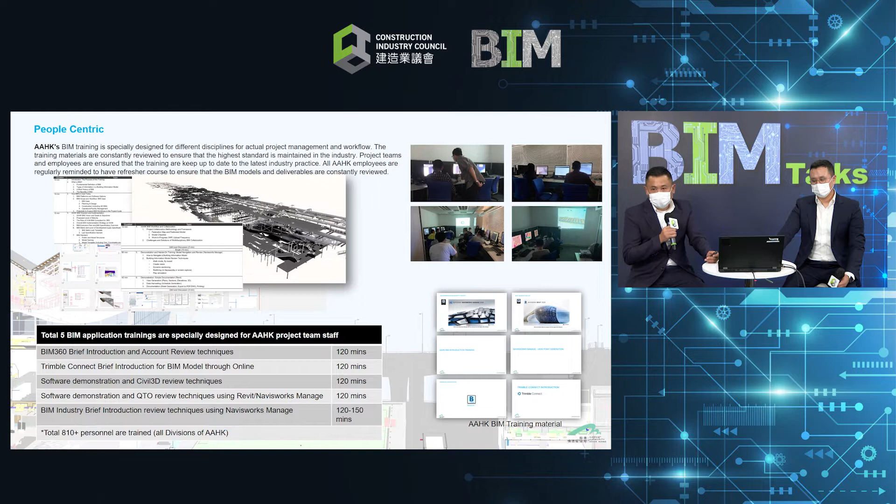In AA's context, BIM is part of the broader digitalization process across the Airport Authority Hong Kong's operations and maintenance as well. So we, the BIM team, always bear in mind that ultimately we should achieve the digital twin for this purpose, and we should contribute to the digitalization of overall operations across the Airport Authority Hong Kong.

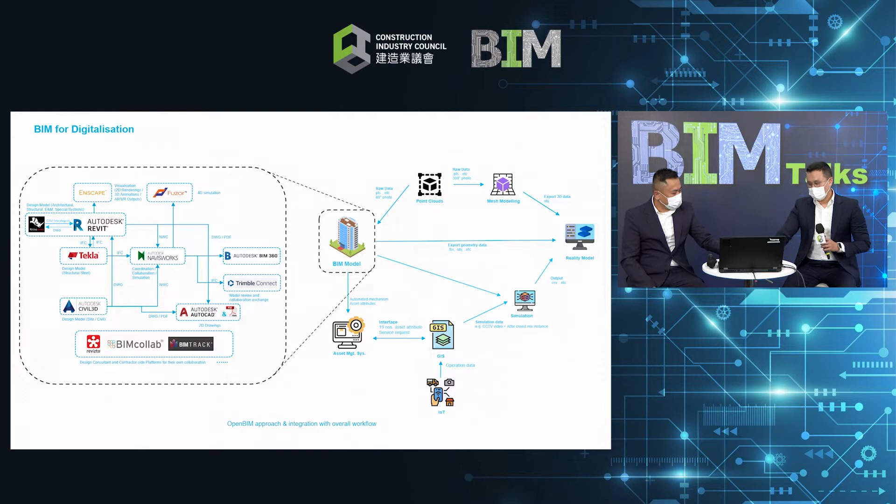So in AA, we adopt the BIM use from the technical circular by the Works Branch, and also the recommendations from the CIC BIM standard.

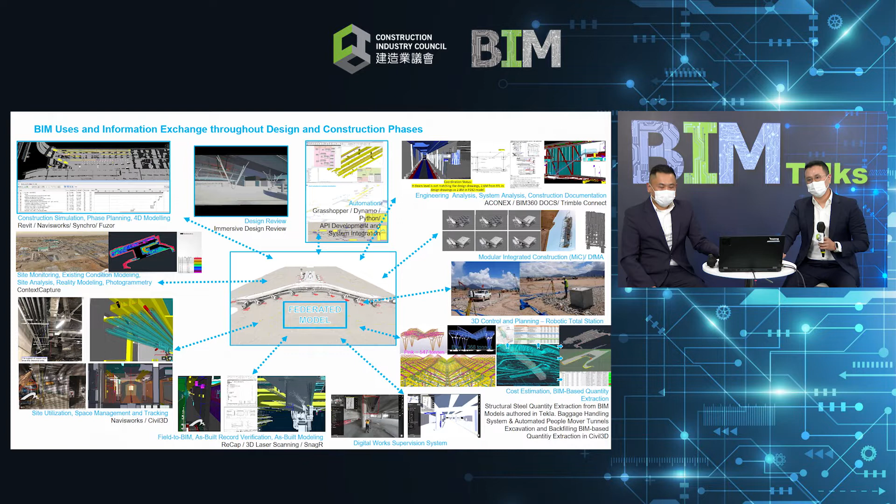The three runway system project is a 141 billion Hong Kong dollar project. The number of projects implementing BIM is sitting at 45 plus.

All projects are mandated with bi-weekly submission of work-in-progress models, in addition to drawing submissions and milestone BIM model submissions. There are well over 3,000 model files in the entire project every two weeks, requiring tremendous effort to review and safeguard the models. It's very important to automate the process based on digitized information, and without such measures it's fair to say it's impossible to manage this project in terms of BIM.

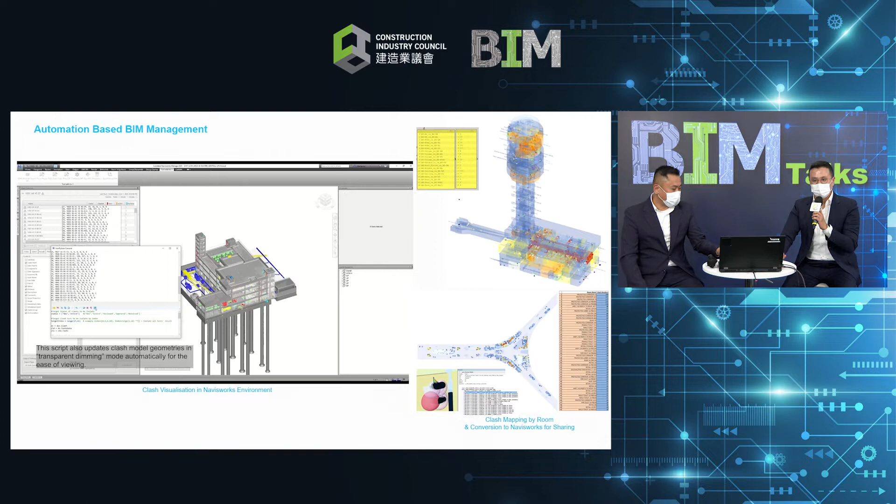This example shows how we cope with clashes, automating the clash visualization process for internal sharing. To provide more insightful statistics of the clashes, we created an automatic workflow to measure clashes based on disciplines, rooms, and congestion levels.

In terms of design in the three runway system project, we are implementing two major architectural projects: Terminal 2 expansion and Terminal 2 concourse. It's very important to understand the architectural features in terms of fabrication and logistics for the construction phase. So we devised an automation script to regularly review the design development of architectural features, so we can understand the geometry, types, numbers, and explore possibilities for optimization.

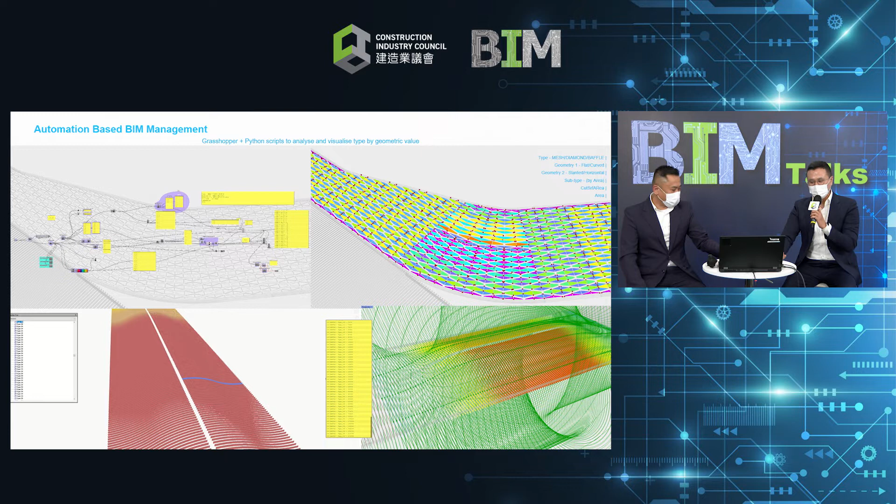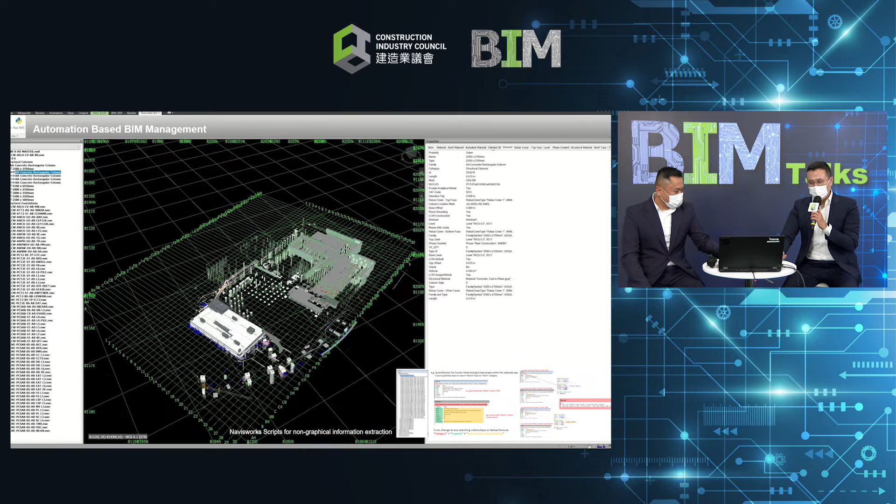This example is about reviewing non-graphical information, another crucial aspect of BIM delivery. In our context, we define the necessary non-graphical information along with the design consultant and contractors for each project. To review such information holistically, we automated the data extraction process from the federated BIM models, and now we're starting to further automate the reviewing process itself.

Now we would like to present some of the works from our collaborators. As we discussed in bi-weekly BIM progress meetings, we already expressed the importance of adopting this automation process to achieve consistent data, ensure the right information is incorporated, and make sure information in different documents is well aligned.

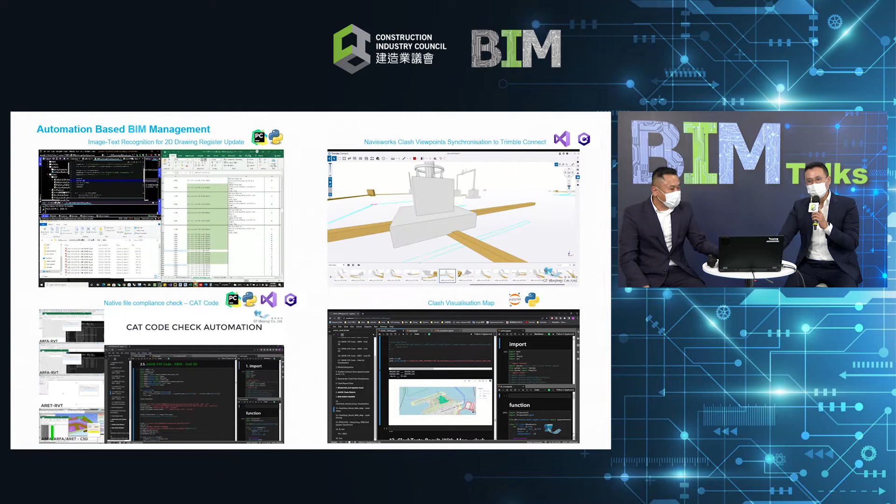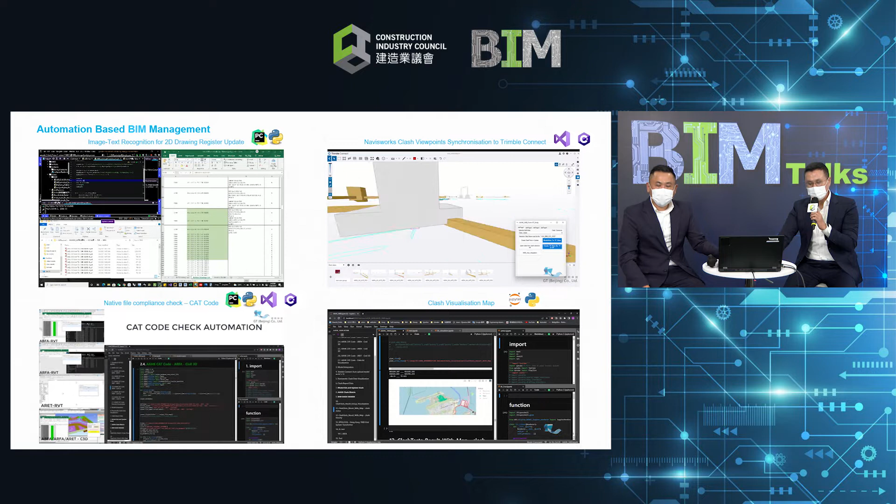What we are trying to do here is cultivate a culture of sharing this kind of knowledge, so we can maximize the efficiency of BIM implementation altogether. After all, software developers continue to include more automated functions as native features, so automation scripts often become obsolete. We have internal resources to work with design consultants and contractors on this matter, so we can move in the right direction altogether.

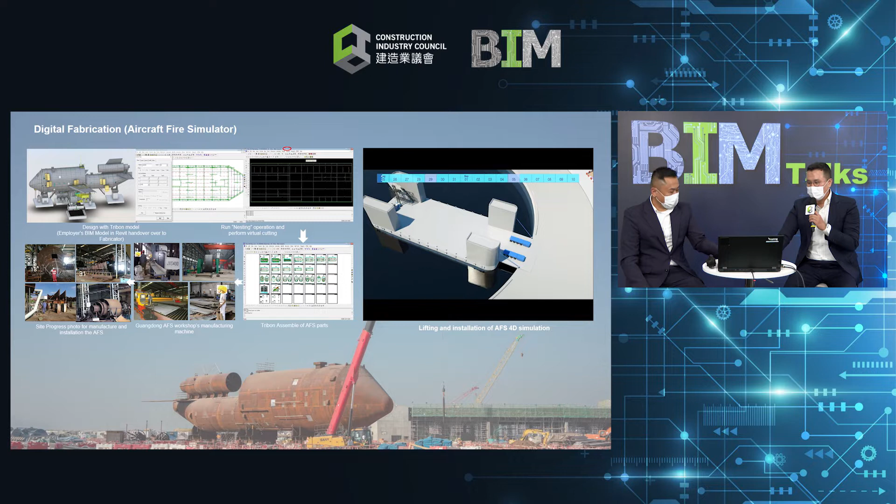The aircraft fire simulator is a classic example of digital fabrication, with all elements fabricated and assembled at a workshop in Guangdong province. For manufacturing accuracy and ease of assembly, digital fabrication was adopted using CAD software called Tribon. Using the employer's model, it was further developed with necessary details, shop drawings were automatically generated, and steel plates were cut and curved using the data from Tribon to achieve consistency between design and fabrication. They were assembled and delivered to the site for installation, as shown in the 4D simulation on the right-hand side.

Other than that, AA plans to adopt and promote extensive application of DFMA, MiMEP, and also MiC in various areas of the AA project.

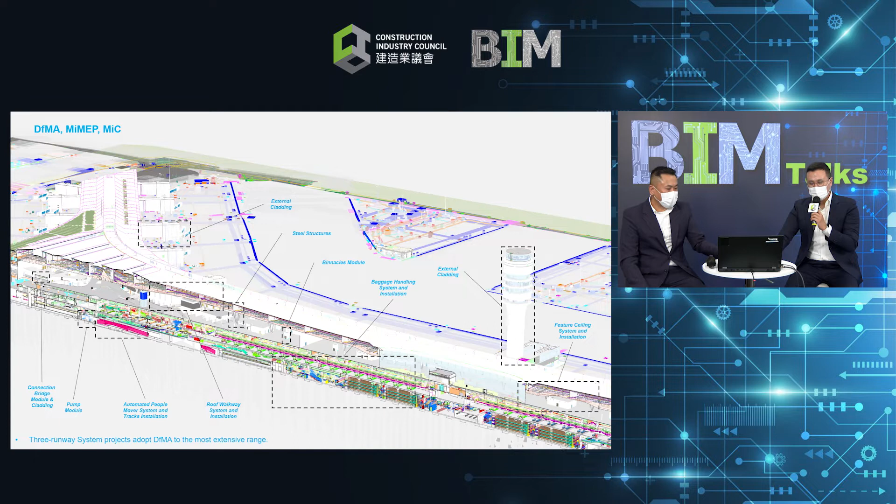Next part is the GIS integration. AA utilized the geospatial data management system for obstacle limitation surface management, meaning the altitude restriction for any object based on the location around the airport. Such GIS data is extracted and integrated with BIM and checked if any permanent design or construction equipment are clashing with such a surface. It helps us arrange the necessary exemption for any crucial construction activities. This is one good example that BIM can unleash computational capabilities.

And the highest altitude monitoring system, the idea is quite similar. HAMS is a platform that combines data from sensors and GPS of all vessels in and out of the 3RS construction area and areas nearby. This platform monitors the location and altitude of any activities for any necessary warnings. All contractors' vessels with air draft greater than 5 meters are required to equip this sensor for real-time monitoring.

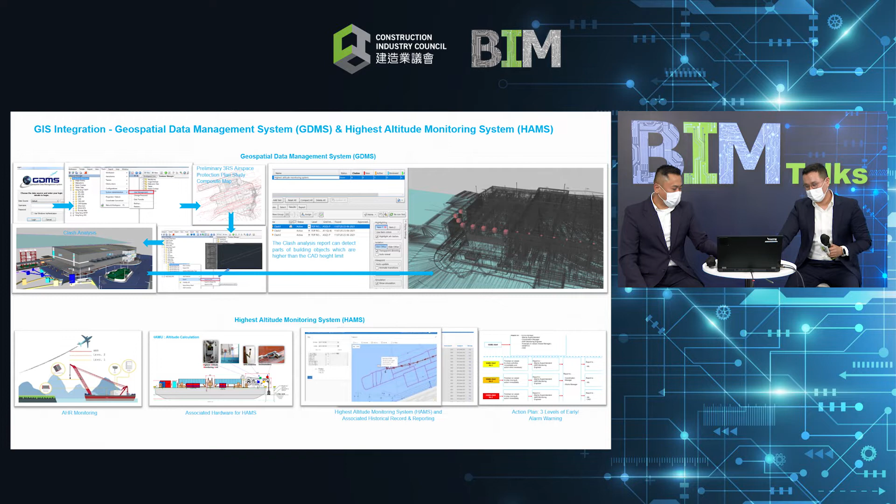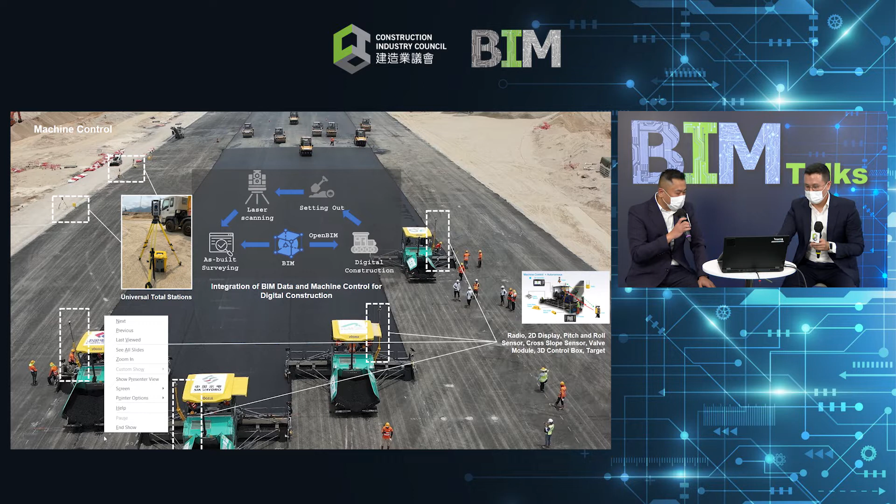The airport runway is paved with multiple layers with a total thickness of around 1 meter in order to withstand the extremely high loads and tire pressure from the aircraft. So we've been thinking a lot about applications, doing a lot of modeling, doing a lot of coordinations based on BIM models. And how do we bring this data out to the field to help the contractors?

One application really worth mentioning is the machine control that we've applied here. The idea for pavement constructions is to install machine control equipment, including 2D displays, pitch sensors, valve modules, 3D control box, 2D displays and targets, together with universal total stations for checking alignments.

These BIM models, designed by the consultants in Civil 3D, are integrated into true open BIM concepts, integrated into these machine controls for digital construction. This includes all the setting outs, and laser scannings done to double check the qualities, together with our survey teams.

So overall, here's one video, just a quick glimpse of the machine controls.

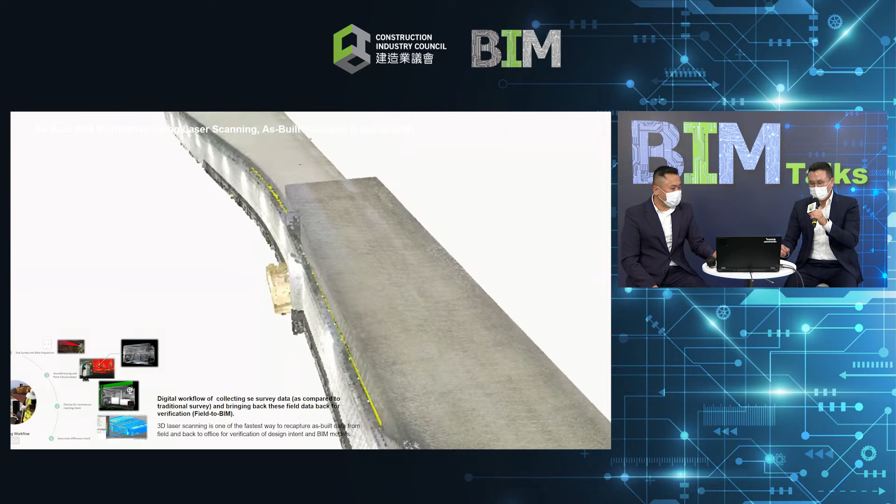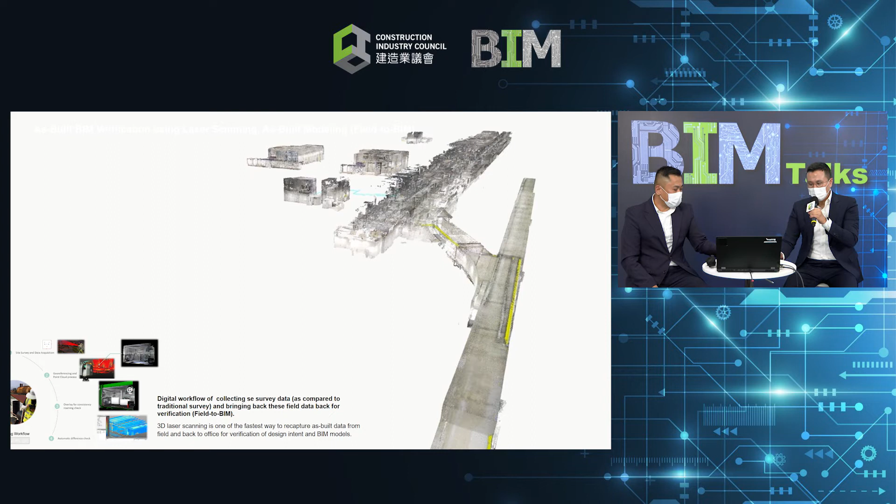One thing to be wary of is the time limitation, for example the backfillings. This is an ongoing exercise so that eventually the whole 3 Runway System project will be scanned for the record.

Next part is the digitalization works done by other departments of AA in collaboration with local institutions for developing a real-time trolley supply monitoring system.

Hong Kong International Airport is one of the world's busiest airports. At HKIA, more than 100 airlines operate over 1,100 flights every day, connecting passengers to over 220 destinations worldwide. In 2017, the airport handled 72.9 million passengers, an average of around 200,000 passengers per day. To handle such high passenger and baggage flow, HKIA has 13,000 luggage trolleys to serve passengers' needs.

One of the challenges faced by the airport is ensuring sufficient provision of trolleys at various pickup points throughout the terminals for passenger use. HKIA used to manually inspect trolley racks for availability, but this was not very efficient in such a large airport.

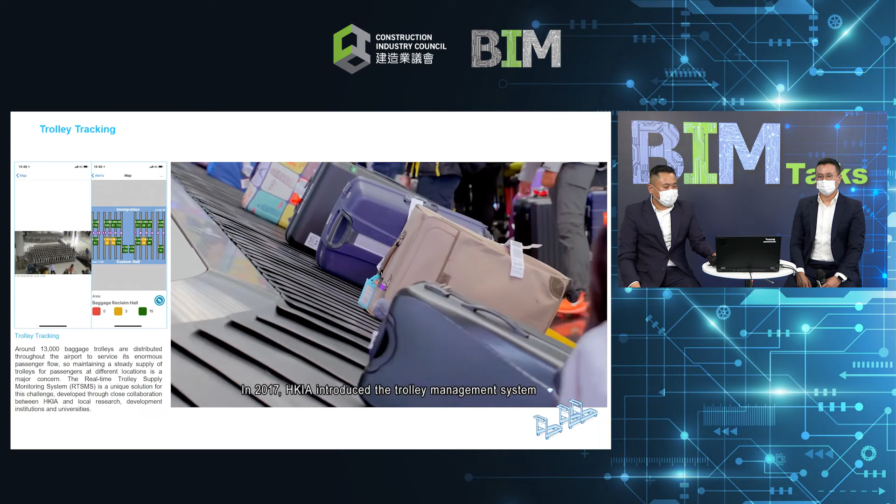In 2017, HKIA introduced the Trolley Management System, which adopts artificial intelligence and video analytics technologies to track trolley supply at each pickup point in real time. Individual trolleys can now be detected in video content from CCTV using machine learning techniques. After summing up the number of available trolleys at each rack, the data is immediately transmitted to the monitoring system and mobile app.

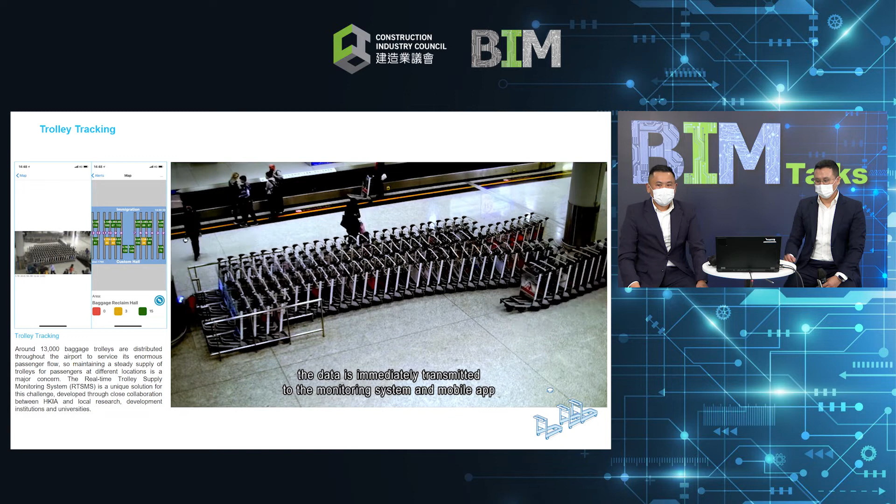With the mobile app, the trolley contractor can know any trolley shortage at specific trolley pickup points in real time. They can then deploy trolley assistants to replenish the trolley racks accordingly.

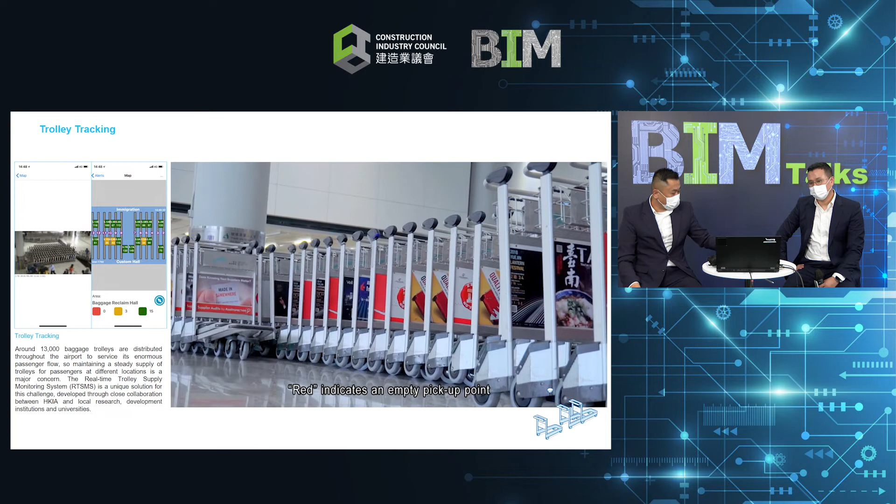The trolley mobile app uses red, yellow, green color codes to summarize the real-time status of various pickup points. Red indicates an empty pickup point, which requires immediate replenishment of trolleys. Yellow indicates a likelihood of trolley shortage, while green means there is a sufficient supply of trolleys.

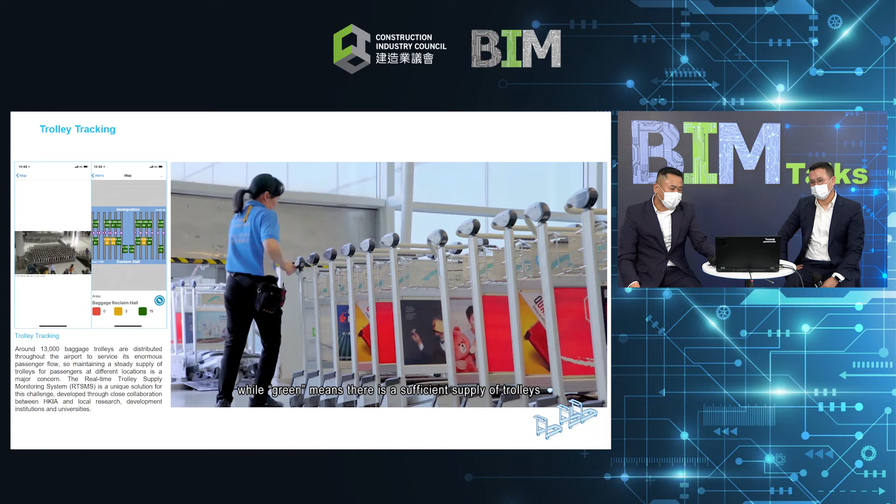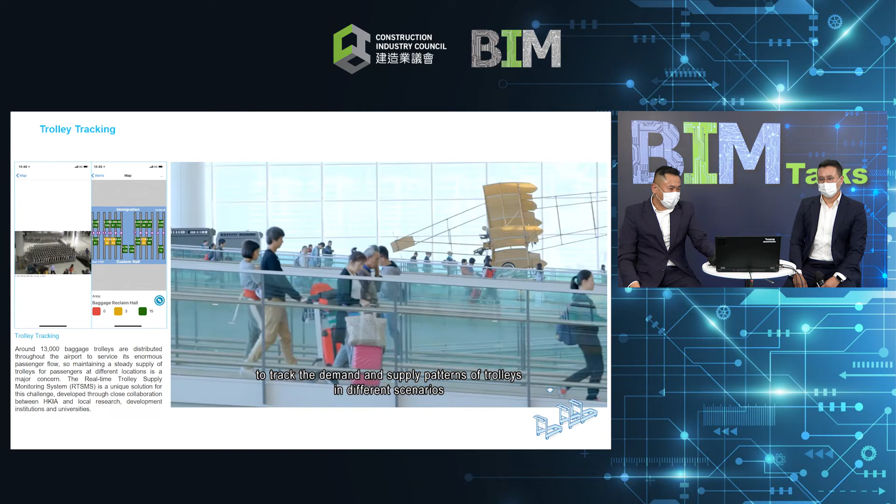In addition to the mobile app, the system also provides analytics and visualization tools to track the demand and supply patterns of trolleys in different scenarios. The analysis from the trolley demand and supply data may provide insights into better resource management at this dynamic airport.

HKIA has been named the world's best airport more than 70 times, and its key to success is placing great care in every single detail of its operations.

And the next part is the AGL, Airfield Ground Lighting System. This system serves as the visual aid for pilots to take off, land, and taxi the aircraft during nighttime. So the maintenance is quite important, and there are about 14,000 fixtures around the airport. So by developing the scanner, the operation department could easily identify the defective AGL object.

AA is planning to invest another 50 million in further development of autonomous driving technology. We are the first airport that deployed autonomous baggage tractors in the live airport operation environment. And there are more to come, for example, the autonomous patrol cars.

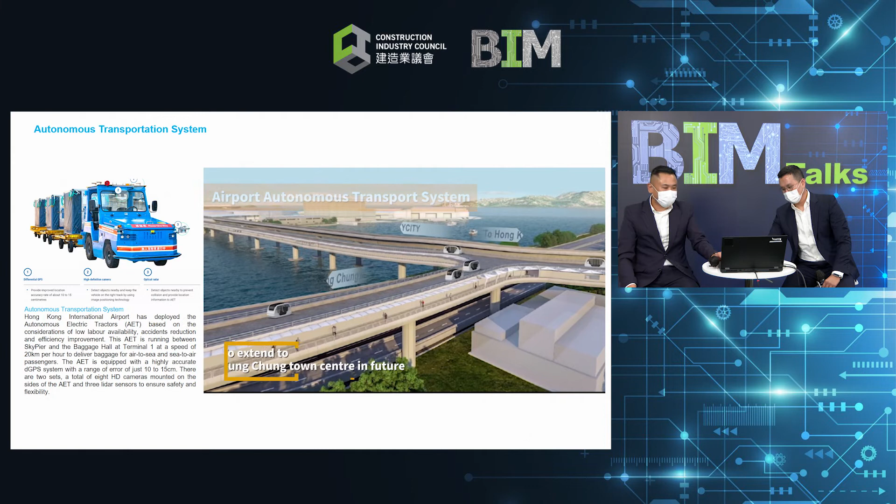Digital twins. So for the past 15 years, we've been handling 2D CADs, right? Transforming from 2D CADs to BIM and then to GIS. We have spent huge effort in digitizing all the existing terminals and concourse.

The BIM teams are ultimately the keepers of all the BIM data. And for new design construction contracts, we are applying full BIM use, especially for the 3 runway system. All of this data will be subsequently handed over to our engineering and technology teams, our asset management.

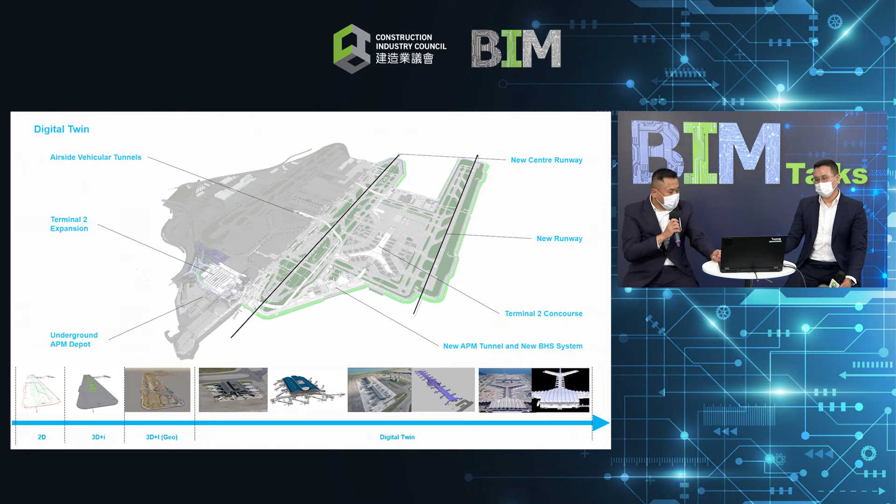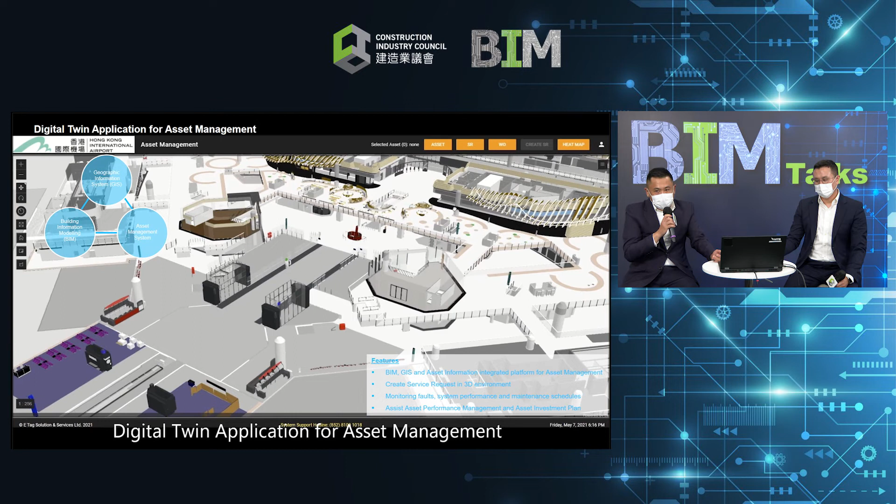One of the major roles is to ensure the upkeep and maintenance of the assets. Facility managers and management officers are always tasked with different challenges. So for data capturing, business plannings, project deliveries in terms of design and construction, and operation plan maintenance, each cycle plays an important role in the corporation.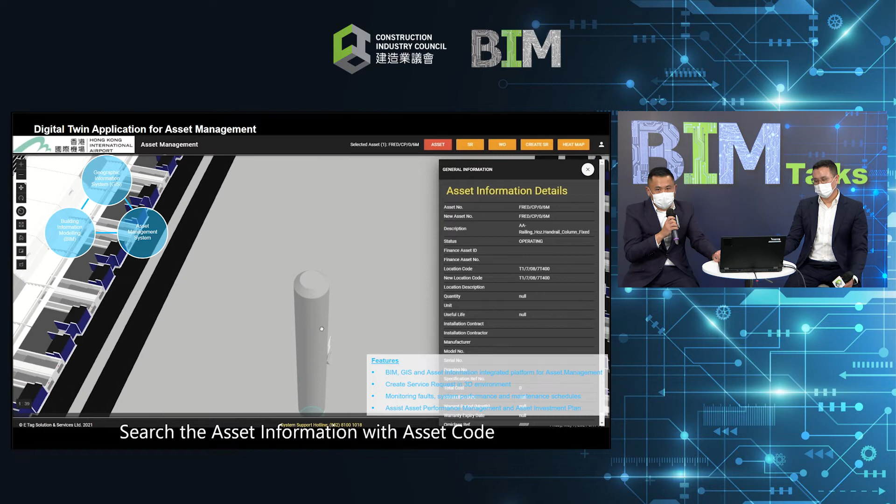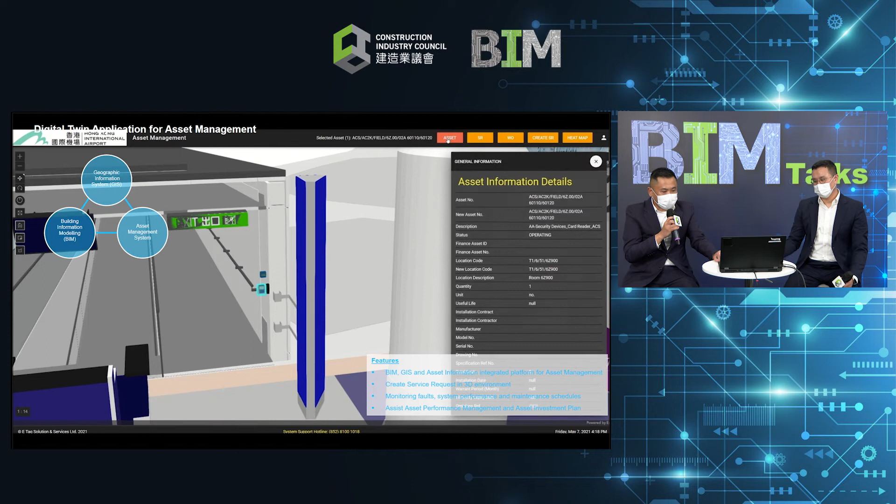This is showing one of the platforms and one of the initiatives from my counterpart in terms of BIM and asset management. It's really creating these service requests in the 3D environment, monitoring faults, system performance, and so on. There's also work orders.

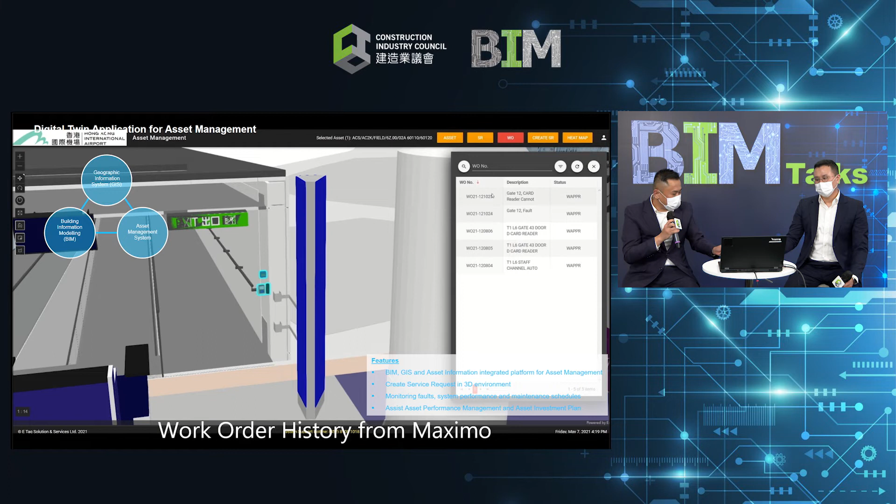Integrated marine traffic control centers. So basically, the MTCC was set up on site to monitor all the marine traffics, and all the construction works for the DCMs for the 3RS projects. An Automatic Identification System, AIS transponder, was installed on the vessels so that every 30 seconds this data is sent back to the MTCC.

Personnel working on the projects have access to the platforms, or even using smartphones or tablets, for real-time monitoring.

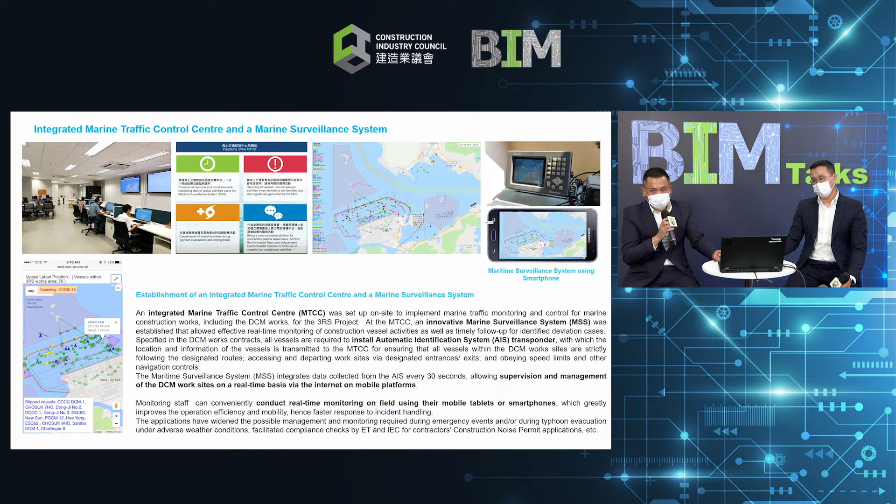For sustainability, a range of biodiversity conservation and enhancement initiatives are being implemented as part of the long-term efforts to protect and enhance various habitats and environments around HKIA. So one of the implementations is definitely the dolphin exclusion zones using the CCTV monitoring systems.

A second part is one of the trials being done by AA: the robotic and AI-based intelligent robotic waste sorter systems at T1 Terminal Concourse. That was done in March 2021. The trial involves sorting of general waste and recyclables from HKIA to test the capabilities, efficiency, and limitations of the system on various settings, with an aim to identify the most optimal operating environment and improve HKIA's waste recycling performance.

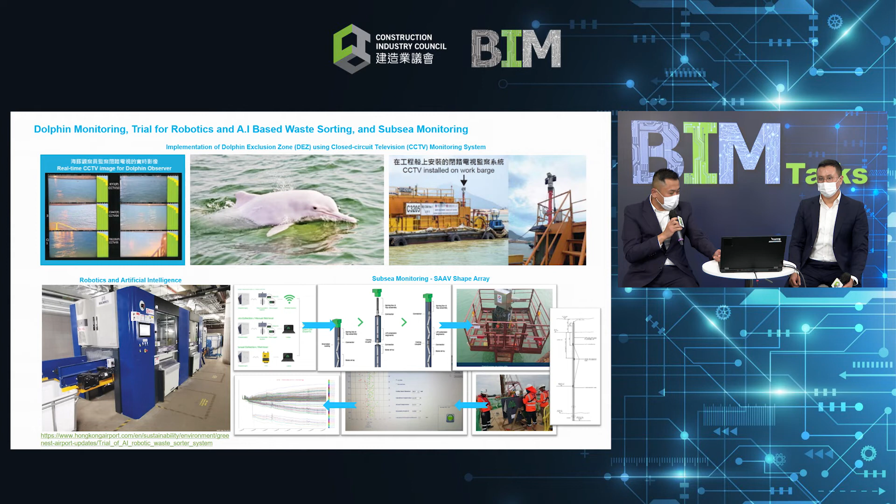In terms of reclamation projects, there's a lot of monitoring sensors and monitoring systems being installed, especially for seabed monitoring. These include the vertical shape arrays to monitor the lateral movements of the seabeds, including the horizontal shape arrays that were installed.

Within all our design consultants and contractors, our partners, we calculated around 68 collaborators to date. And there's more - my apologies if I haven't included all. Thank you all.